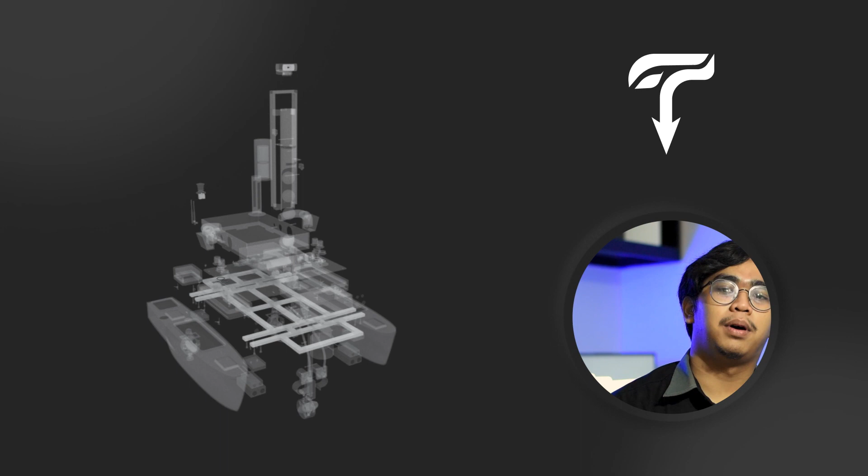There are some new tests for this year's RoboBoat, like Water Blast Challenge and Skiball Game Challenge, so we need more flexibility to do quick design iteration. By having a modular design, quick design iteration can be easily achieved. Modularity allows our ship to be divided into independent parts. These parts can be created, modified, replaced, and exchanged independently with other modules or between different systems.

Moreover, a modular design allows us to ship the ASV as flight baggage by splitting the ASV into parts that fit the dimension requirements for baggage.

Hull is the most critical component of Nala Theseus, as it is what keeps the ASV afloat. This year's tasks mainly require the ASV to optimize its stability. For example, in the Water Blast Challenge, our ASV needs to maintain its position and orientation as the water hits the target until the container is full. Also, a stable hull gives better sensor reading.

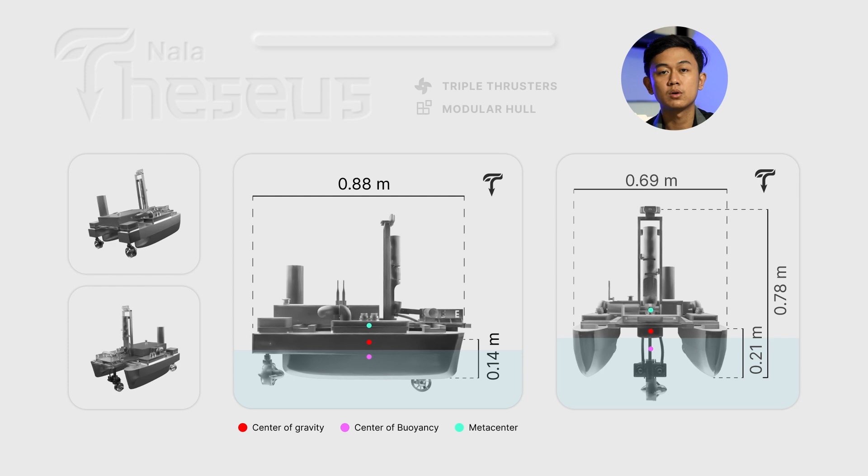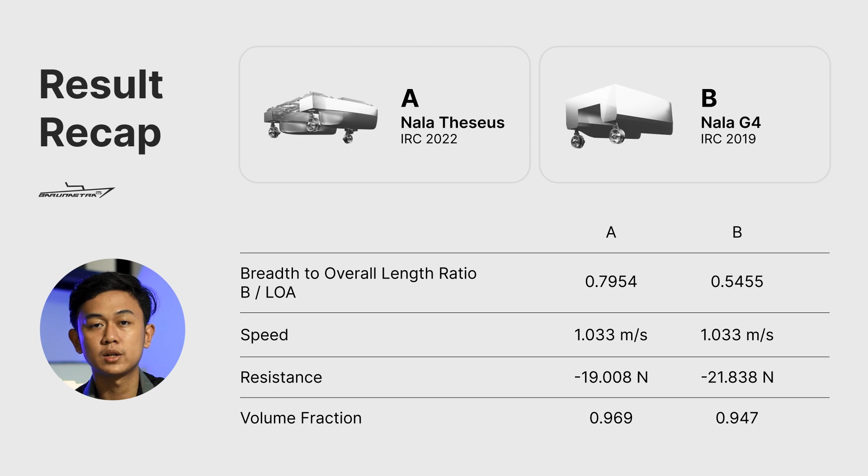Stability focuses on the center of gravity, center of buoyancy, metacenter, and how these points interact to create righting moment. A ship with good stability will have a larger righting moment when influenced by wave disturbance. Therefore, we designed the hull to reduce wave disturbance and remain stable under high amplitude and long length waves. To achieve that, we designed hulls with a relatively larger breadth to overall length ratio than our previous design.

We use ANSYS software to analyze resistance and the ship's motion by setting the environmental condition and speed of 1.03 meters per second. As a result, our ASV is more resistant to pitch and roll motion when maneuvering.

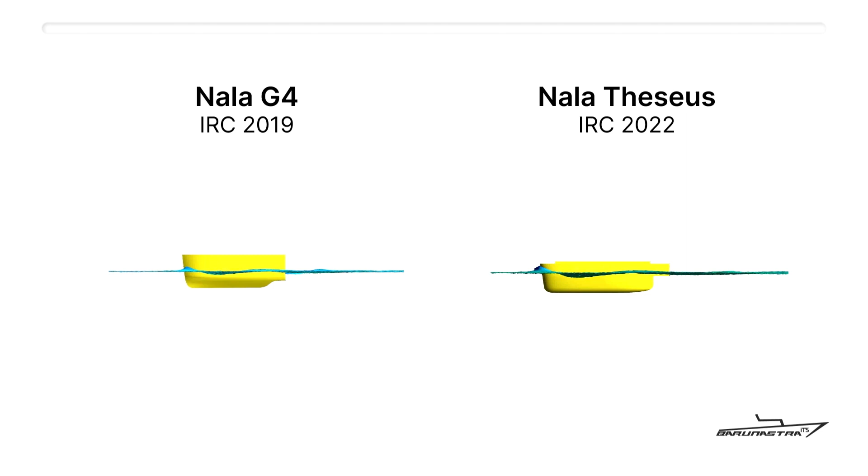To connect the left and right hull of our catamaran ASV, we use a frame made of steel hollow. Using this frame, the deck and hull can be separated, allowing us to configure the deck or even change the hull. The ASV only has one camera mounted on the midship, so it's easier to find the seat at the show challenge.

By maintaining the camera to face the dock's placards and move sideways, like how a person finds his seat at a show, walking sideways to look for his assigned seat number. To perform this motion, Nala Theseus uses 3 thrusters.

2 of them are azimuth thrusters placed on the stern, and 1 is a bow thruster. With these 3 thrusters, 3 types of motion can be performed: pivoting, orientation lock motion, and path following.

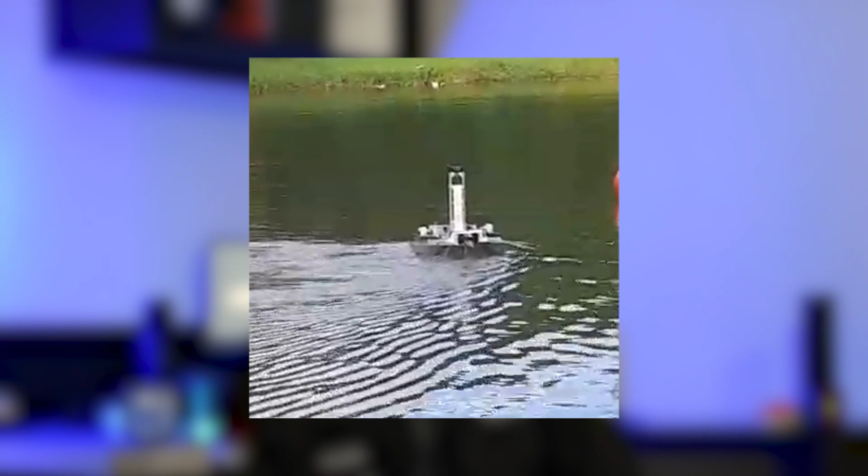Pivoting is when the ASV changes its rotation without changing its position. Orientation lock motion is when the ASV changes its position without changing its orientation, allowing it to move sideways. Path following is when the ASV follows waypoints.

Using 3 thrusters not only tackles the find a seat at the show challenge, but also supports challenges like Water Blast, where the ASV can perform pivoting motion to aim, and other tasks that require ASV stability to maneuver, like avoid the crowds and snack run.

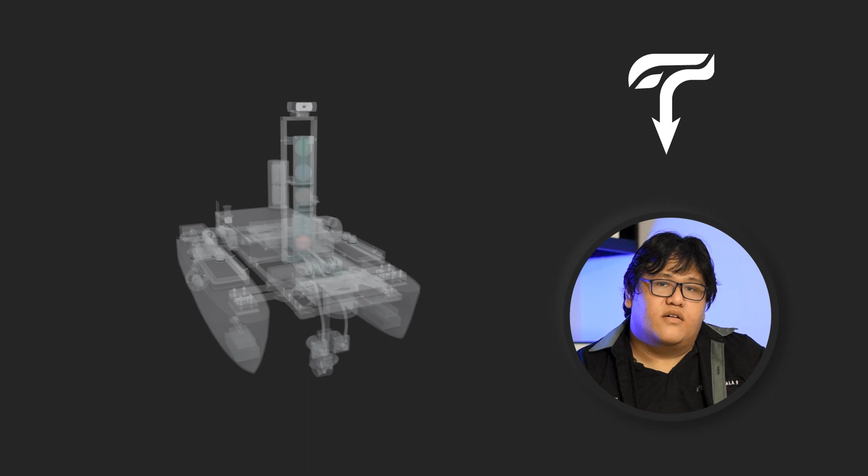For the Skiball Game Challenge, we designed a ball launcher system that looks like a catapult. Our ball launcher is powered with a DC motor with speed and positional encoder. Using an encoder and a PID controller, the launching velocity of the ball can be kept consistent despite changes in battery voltage.

A motor-powered catapult can also be used for the water blaster. In our design, the water blaster hose is attached to the end effector of the catapult. Since the motor position is controllable, the end effector can become the vertical aim system for the water blaster.

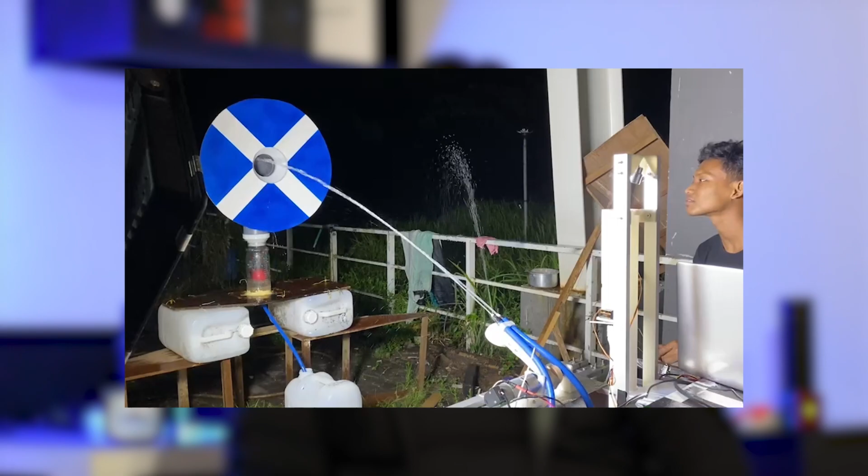Our strategy for the autonomy challenge relies heavily on computer vision. The camera is used to detect objects in the autonomy challenges, as well as random obstacle buoys that are spaced throughout the ASV operating area.

The LiDAR mounted on the bow of the boat was used to give distance information of the objects detected in the camera frame. Some challenges, like Snack Run, have a buoy that, when entering the challenge, is 100 feet away from the ASV.

Due to this, after trying several models, Theseus now uses one of the YOLO V4 architecture variants, YOLO V4 Tiny 3L, for its object detection model. This model was chosen for its speed and accuracy for small object detection. As this model is relatively small, it can be run at 15 FPS on our onboard computer, Jetson TX2.

Modularity allows us to create and iterate our ideas quickly. Those that show promise can be iterated rapidly until they take sufficient shape to be developed. Like Einstein said, learn from yesterday, live for today, hope for tomorrow. The important thing is not to stop questioning.